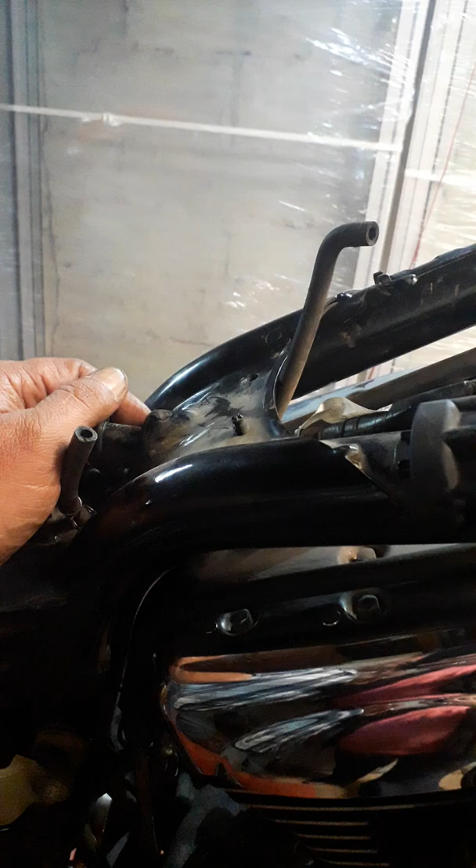Sorry for that. Okay, you take off the seat. I don't know where the phone stopped.

You take off the seat by removing these two 6mm bolts and the one 6mm bolt at the back. Take off the seat, it slides out. It's got a hook that's hooking here. You just lift it at the back and pull it out, and then we come to the tank.

I did remove the tank, I'll tell you now why. It's very simple. One bolt at the back, you take it out with this washer grommet setup, and then here you've got only one overflow pipe. You just pull it off somewhere with a long nose pliers or something. Just lift the tank a bit.

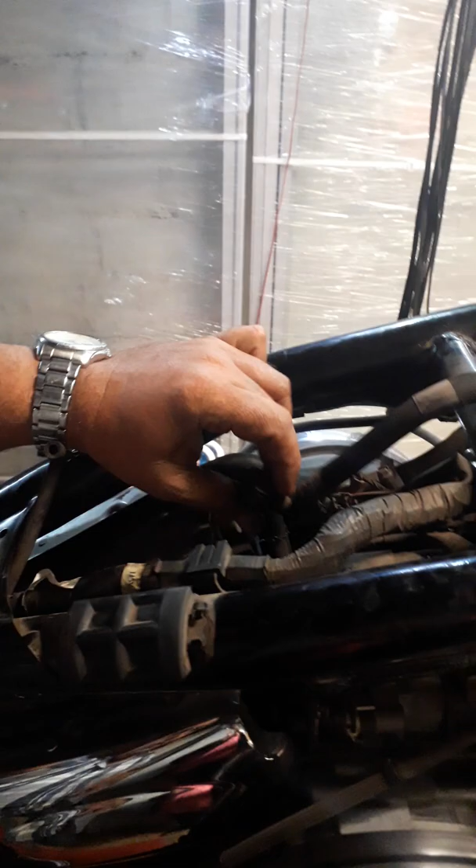Here you've got another underneath - another return pipe or whatsoever. And then this is the fuel injection. This pipe is also underneath the tank, and this one as well.

This one had a clamp, I took off the clamp and removed it. This one has got two simple clips on the side. You just push the two clips in like this and pull it off. I pushed the clips in and I just helped it off with a big flat screwdriver.

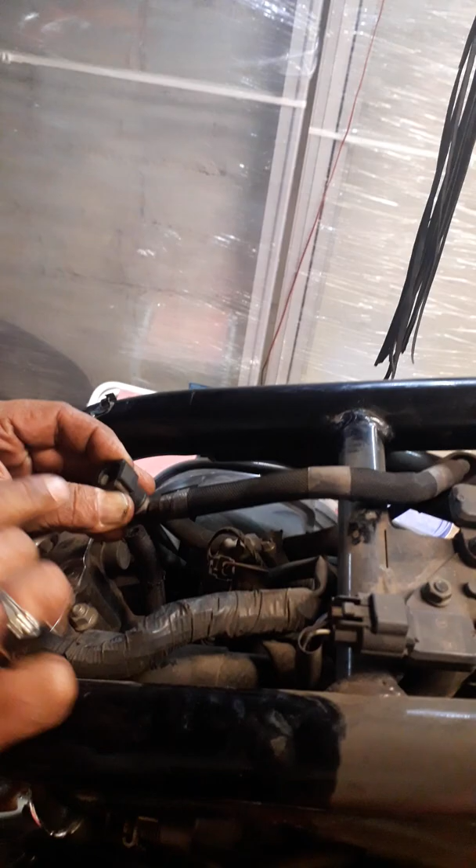Then you lift the tank. In the front you've got the ignition and stuff here on top. So there's only two plugs I took out, and then the tank comes off.

Alright, so I removed the tank, and then I removed only the one exhaust pipe. It wasn't necessary to remove the other one. The reason I removed this one, I think it was in the way of the caliper - the caliper or the stud for the shock.

I can't remember, but yeah, I stripped it about a week and a half ago, and then I ordered parts, so the parts came lately, and now I've got time to carry on again.

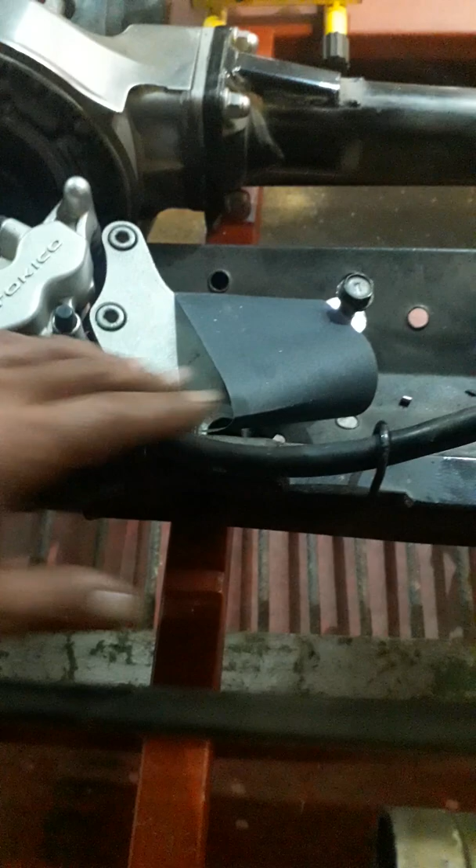Alright, so I took off the brake caliper at the back. It's only two bolts. I never took out the banjo connections here or in front. You can't remove it from here. The only way to remove it from here is to take the banjo bolts out and take it out like this, but it's not necessary, really it's not.

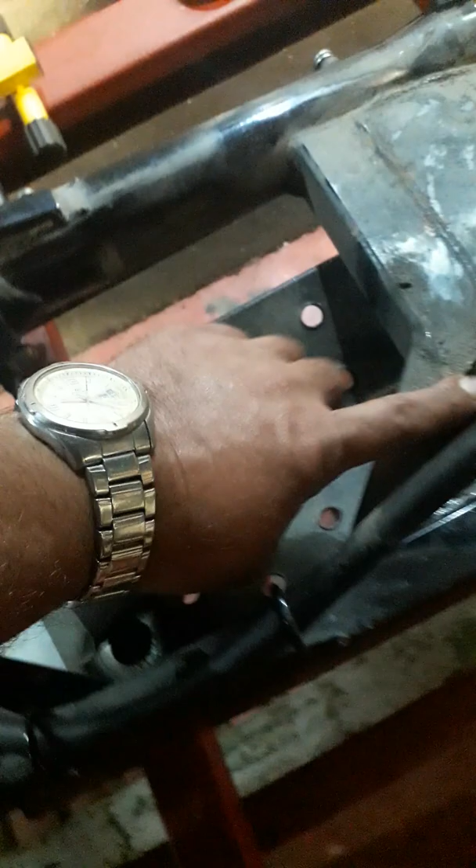You just unclip it here in the front. There's two clips. This pipe, the brake pipe, you will see it's clipped in there. So just unclip it there, very easy. And then I took out the shocks as well, the two rear shocks on top and bottom. It's very easy to take them off.

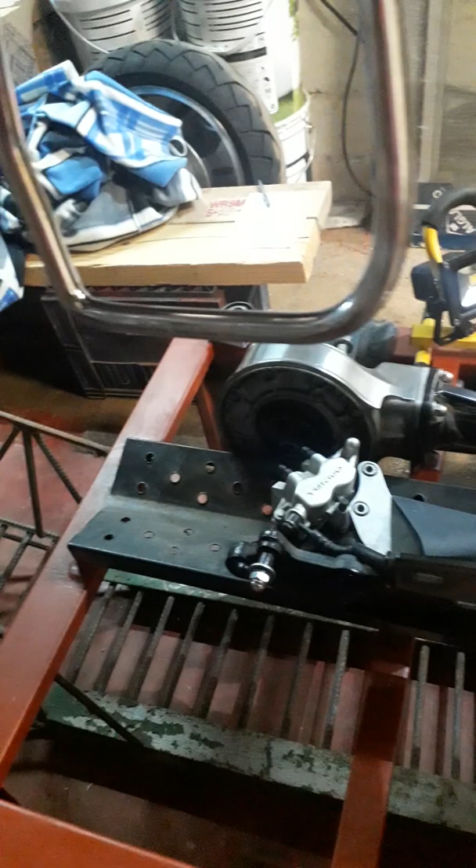The bike bench I've built myself because it's just picking it a little bit higher from the ground. I can't work on the ground like that. So I took a piece of wooden block, I cut it off, and there I put the car jack somewhere underneath the engine and picked the whole bike up.

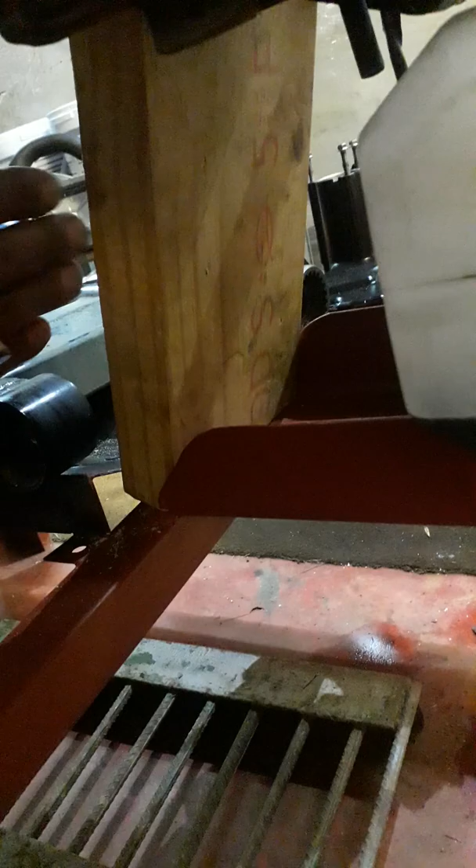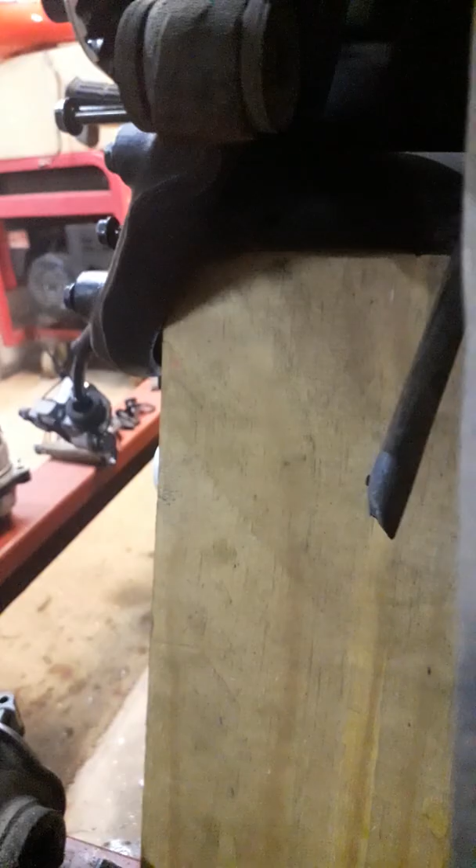And then I put the block here, and here at the back you can see properly. It's a big strong bar here, right there where my fingers is. So I lowered it, and then the bike is laying on that wooden block. And in the front I've got a wheel chock, so it's fine. It's keeping the bike up straight, no problems.

And then also I removed the rear wheel shaft as well. Here's all the parts. And then I stripped it from this side to the left side of the back. And let's go to the other side.

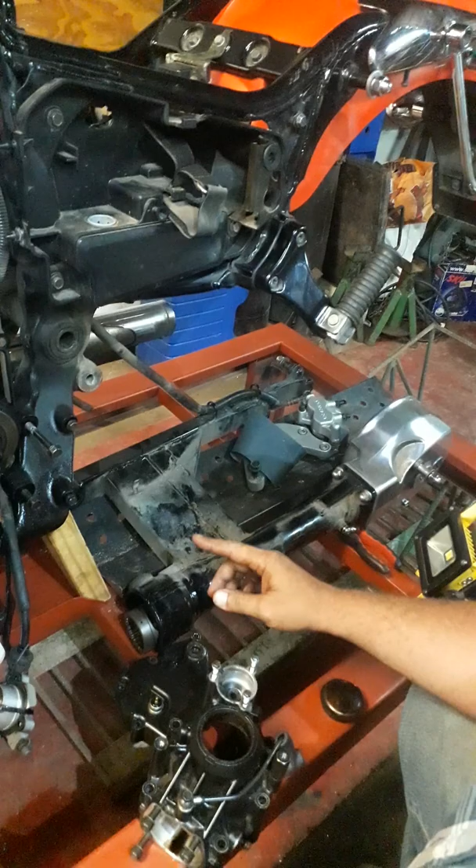Alright guys, so I took off this shock on this side as well, and then I removed the drive shaft first before I took off the rear swing arm with the drive shaft built into it. I took off the drive shaft first.

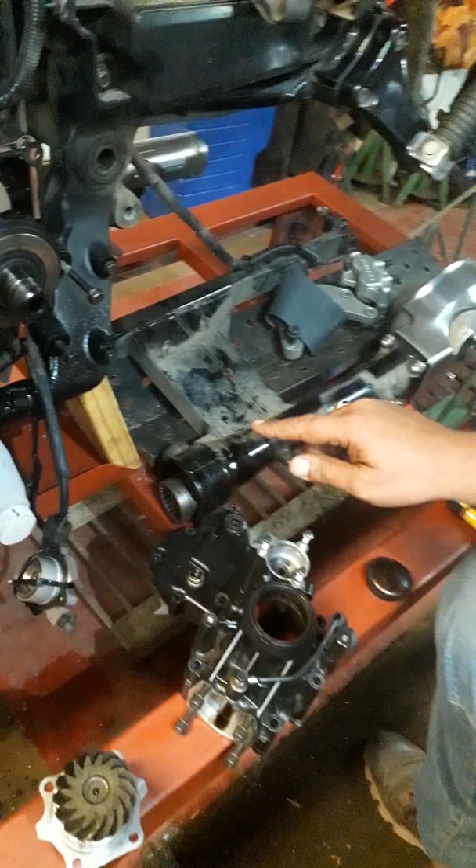Excuse me. There's a trick to remove it, and then you must be very careful. The drive shaft pushes in here, right here. It's got splines, it goes in here. You see there's a little hole - right in front of my finger is a little hole, very tiny hole.

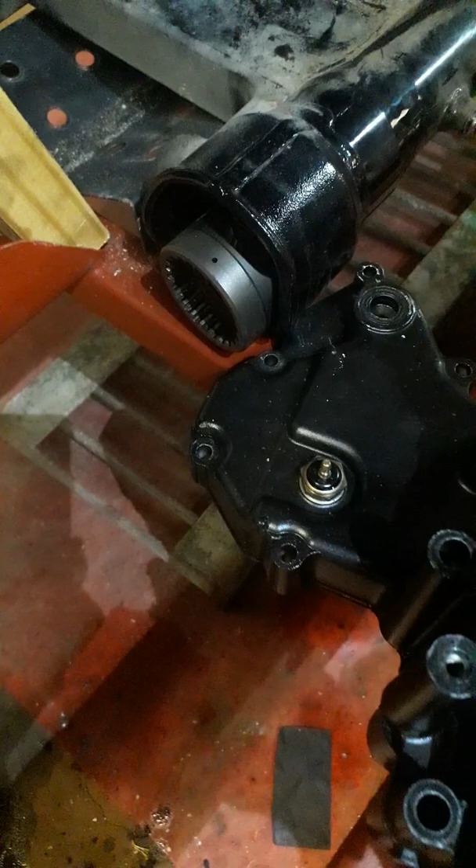That's it. On the inside, on one of them, I can feel it's a little bit bigger on the inside. So what happens there, in this one we've got another hole there, right there.

There's a tiny little pin, and it's very easy to remove, very easy. Because that hole is smaller on top, this little pin - very tiny pin, don't lose it, believe me, don't lose it - goes in there, but it can't come through because the hole is smaller. On the inside here we've got like a plate, spring, something. So if you put it in here, it pushes against that spring, but it's sticking out a bit there.

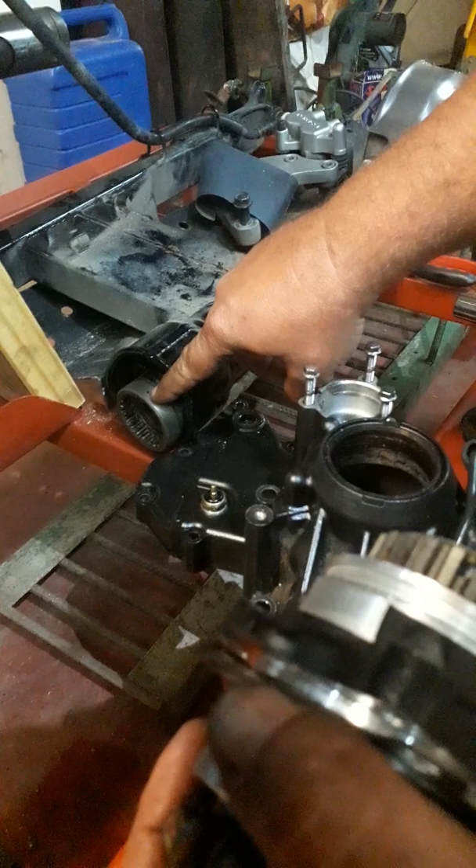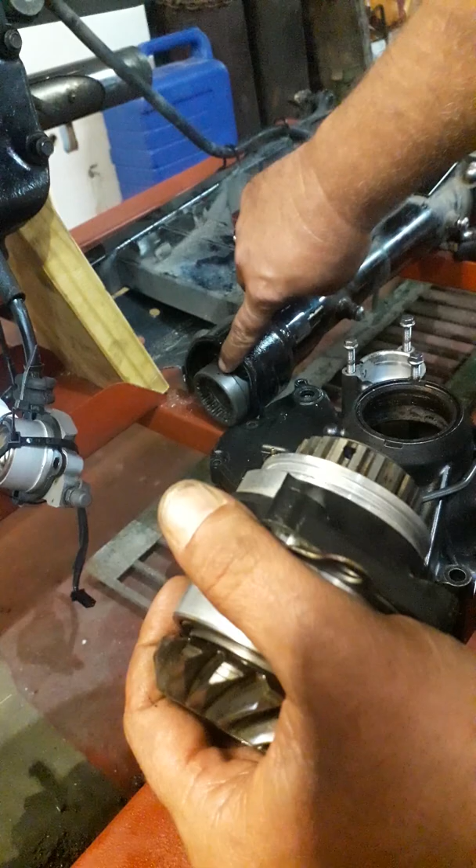And this gear here in front is taper. So with this thing in place, you just push it up, make sure to line up the hole with a pin, and you hear a tiny little click, then it's in. From there, to remove it is very easy. You just take a paper clip or something, open it up and push it in there.

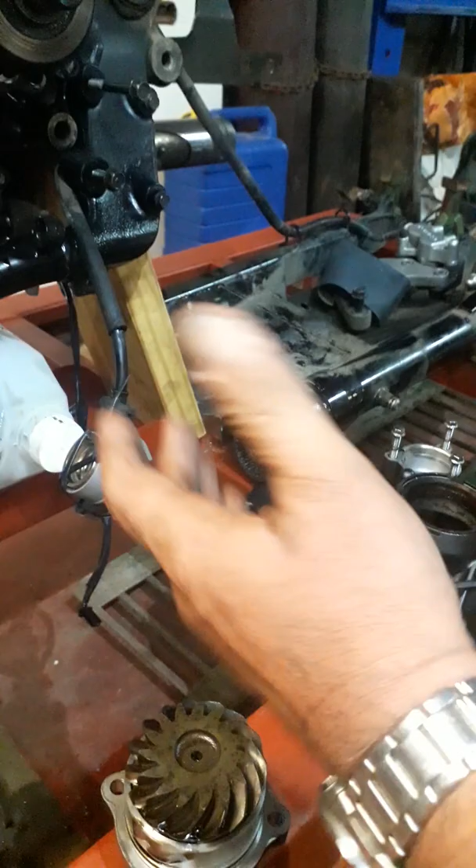Alright, then what I did, I removed the engine mountings.

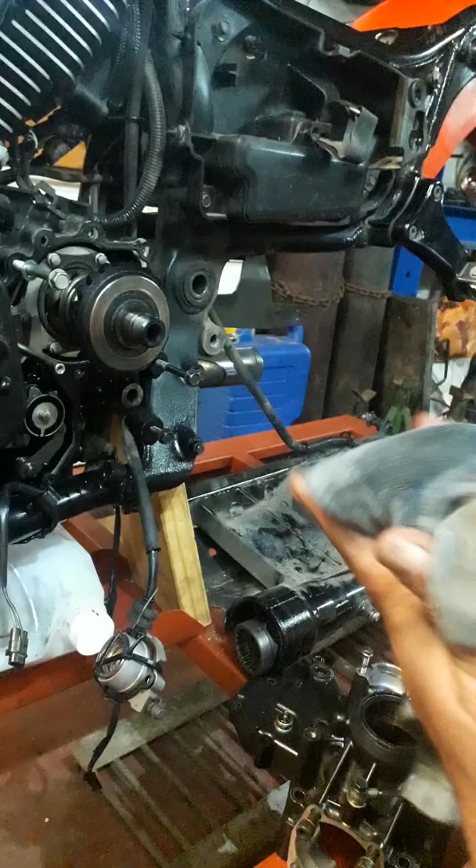The reason there were no clutch on the bike is actually very simple too. I couldn't understand why the clutch went gone and there were no clutch, but as long as you throttle and it's cooling off a bit, then the clutch is back again. But the moment you start closing the fuel, the accelerator, and this noise is there, the clutch disappears again, then there's no clutch anymore.

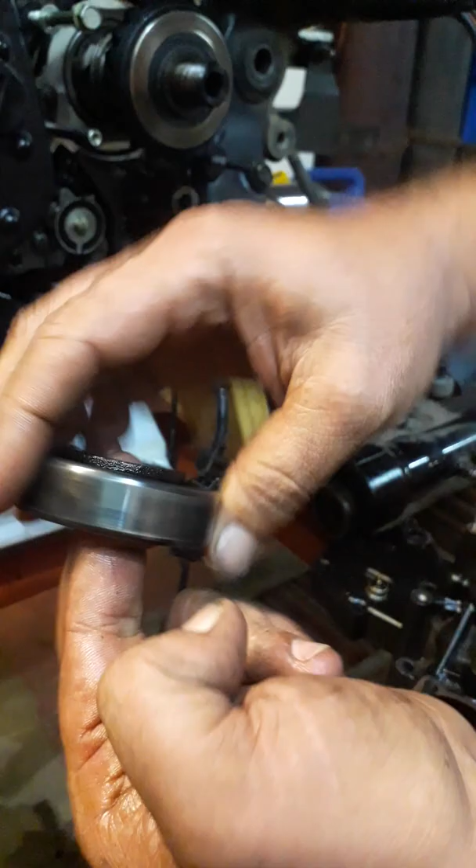The reason why, our bevel bearing - this is the condition of the original factory fitted bevel bearing. Now, some guys in the engineering business will know that this is not right. No ball bearing in the world can work like this.

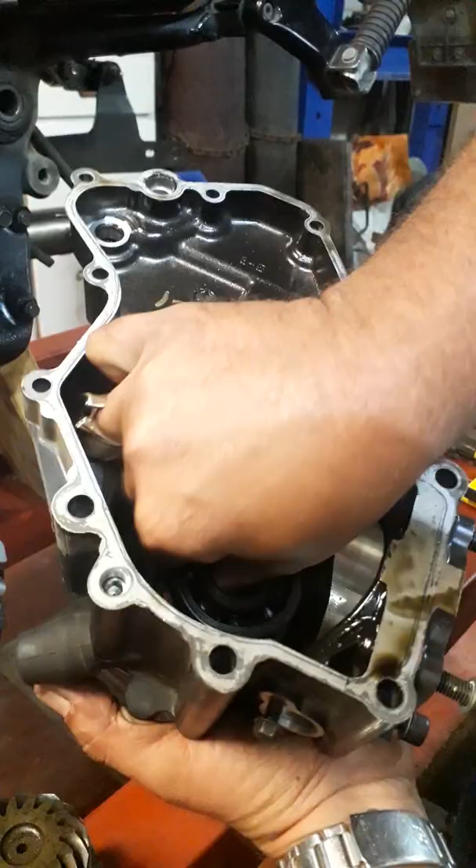Okay, so alright, it is situated right next to the bevel gear with this big nut over here. And actually, first of all, it goes in here first, underneath, into the casing, and then there's a little plate that goes over the bearing.

It's tightening with two small bolts, 6mm bolts. Right there, you'll see when you open it today. It keeps the bearing in place there inside. Now this bearing is the problem. There's the little bolt that keeps it attached.

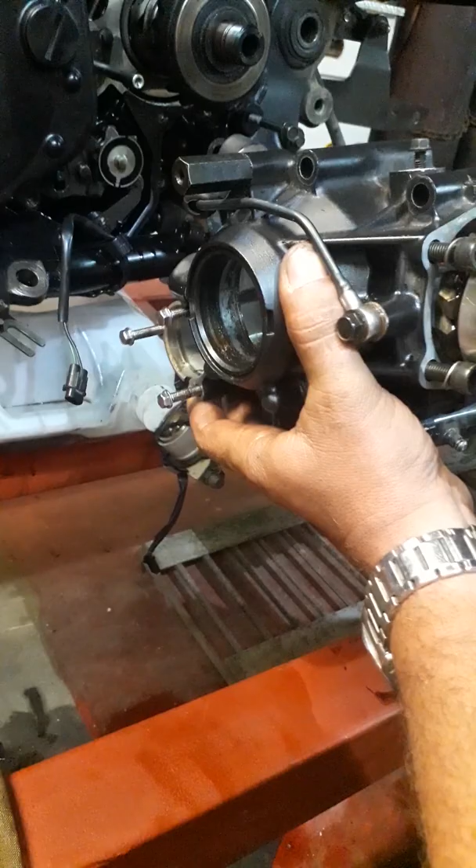So at the end of the day, you've got this cover here. The drive shaft part comes here at the back, exactly like this. The reason why you have to strip everything all around is to take this thing off, because inside this bevel gear - I usually talk about the crown and pinion gear - whatever, works like this.

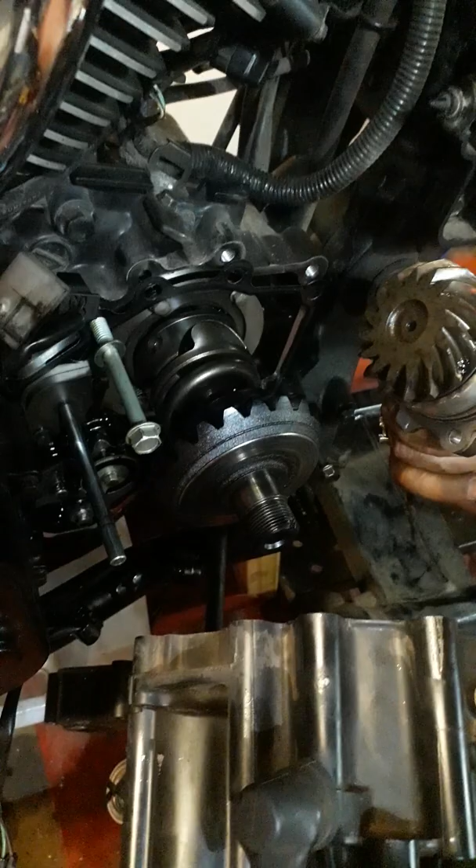Alright, and you can't take off this cover with this piece intact, because it's keeping it. If this gear was on the other side, yeah, no problem, but this is the problem. This is the reason why we have to strip everything to get this drive gear out from the back side.

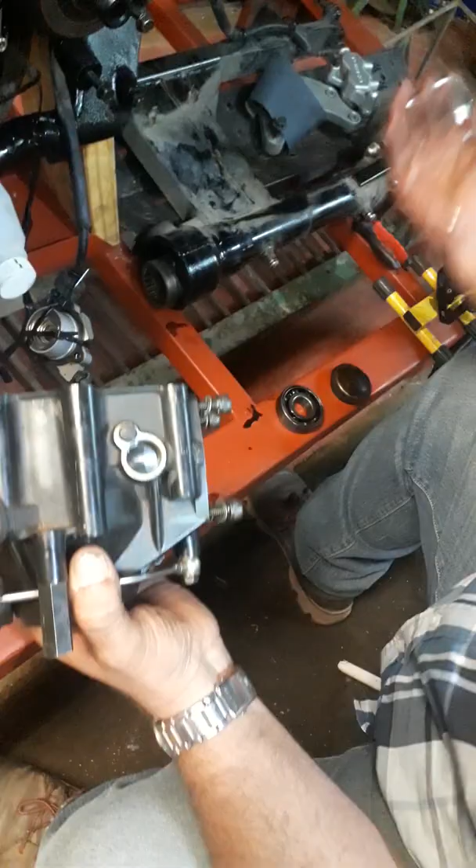Alright, so to cut a long story short, I removed the engine mountings at the back. While it's still standing in a block, I was lifting it at the back. The reason why - only one bolt - you struggle to get it out. You really struggle. You can loosen it, you can take it out halfway, but it pushes against the frame. Alright, that's the first thing.

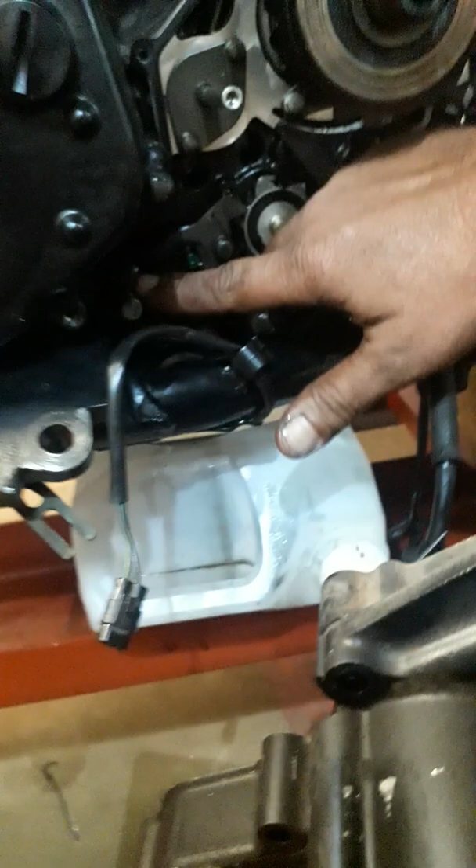The second thing is the gear lever shaft here from the gearbox. Put some more light for us. There we go, there you see the gear lever shaft. The gear links goes onto it. This one, it goes in just like this, in this position.

Now this is another problem to take off. Only to take this link off that shaft, because you have to remove it before you can pull off this cover. Alright, so what I did is I even took out the front engine mounting, I even loosened the front two bolts.

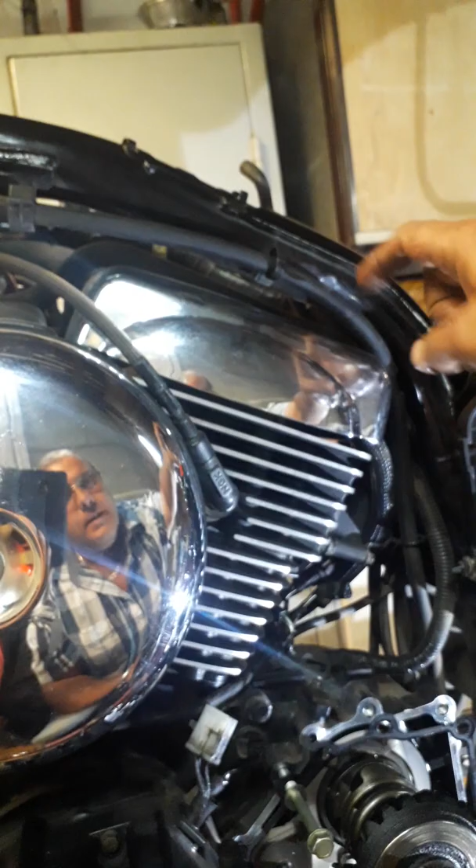This is the reason I took off the tank, is because to lift the engine, so it mustn't push the tank and stuff. But I can lift the engine. What I did is, eventually, it took me about 3 hours to strip everything to get this bevel bearing out.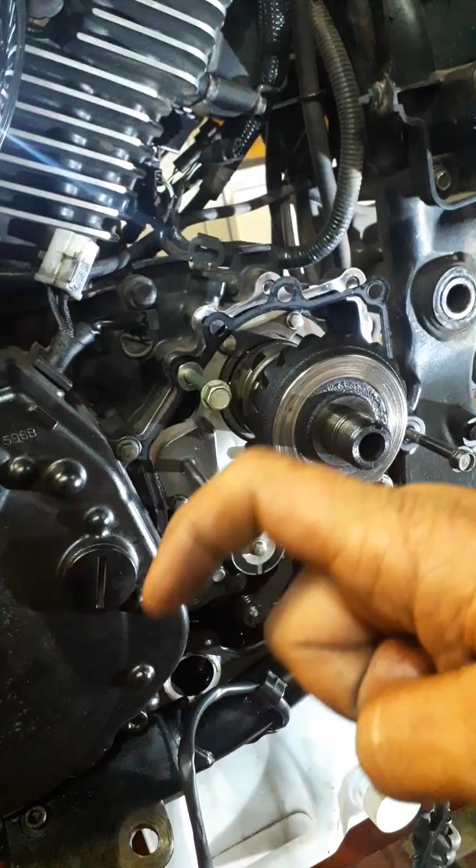Of here, what I did is I took a guala - I don't know, I believe guala is the right English word for it. It's a piece of iron with a point like this, but only a little bit.

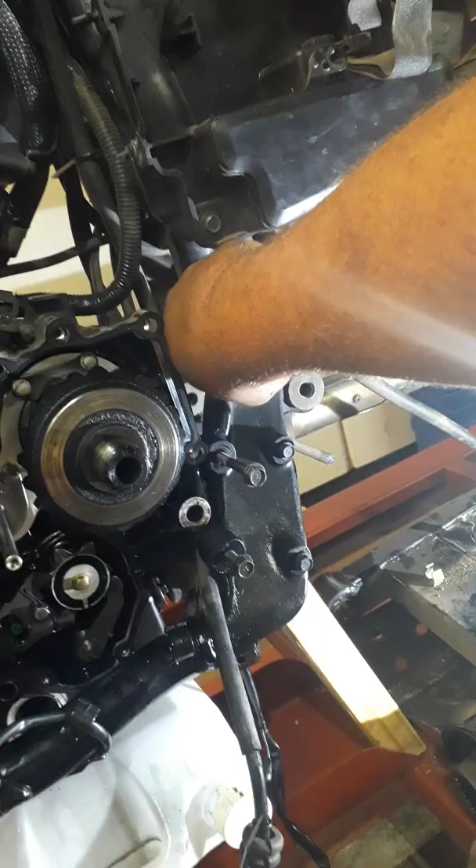And then I put it here at the back. Just be careful for the pipes, don't hurt the pipes at the back. And then I push the engine forward a bit.

The reason is to get it forward is for this. Right here I experienced some problem because you have only like 1 inch, 25 millimeters gap. That's it, that's not enough to take out that bolt at the bottom and that gear shaft.

Alright, so I took off the front mountings as well, and then I moved the engine a bit forward, and then I tilted it over like this, and then still not easy, just take it off. I still struggled, but I managed to get it off.

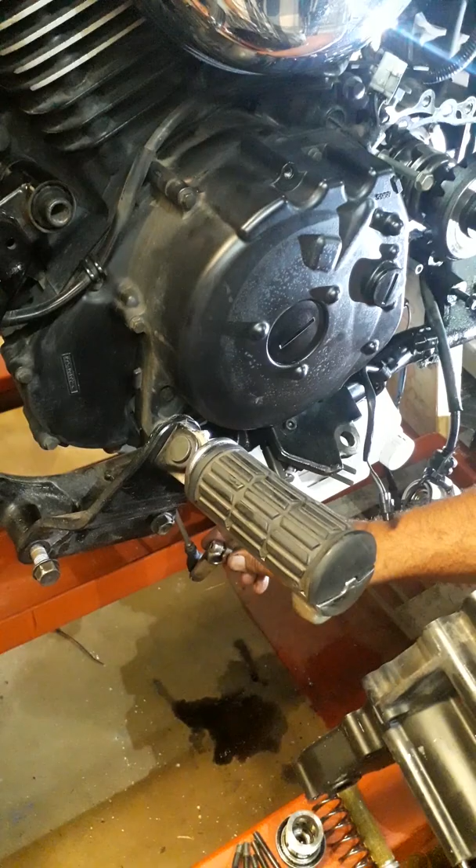Alright, the one bolt out, and then the other one is that link. I took out the bolt, and I took a big flat screwdriver and I wedged it open as far as possible. Be careful, not too far, it might break off.

This is just a casting, so it's not very flexible, and it's easy to break. So I just wedged it open a bit, and then I took it off eventually. Alright, so I took it apart.

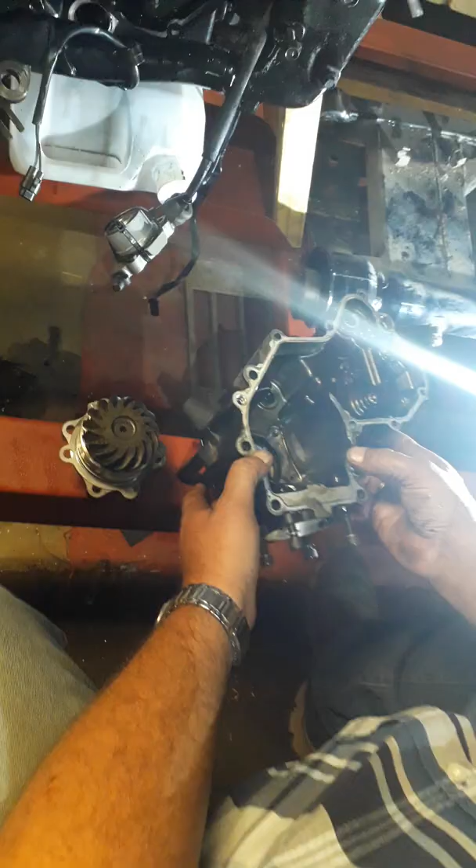I've stripped everything up and until here where I am. I haven't cleaned anything yet, but the moment I took off this cover, I wiped out some of the pieces on this cover. On the end of the day, a bearing with play like this, you must have shavings, and the shavings were laying all over here inside, etc, etc. So underneath...

Underneath here we've got a pre-filter right here behind the stand, actually, but on the engine we've got a pre-filter. It's a big bolt like this. You must take it out, please guys, take it out. Then you'll find it inside. It's just lying like this.

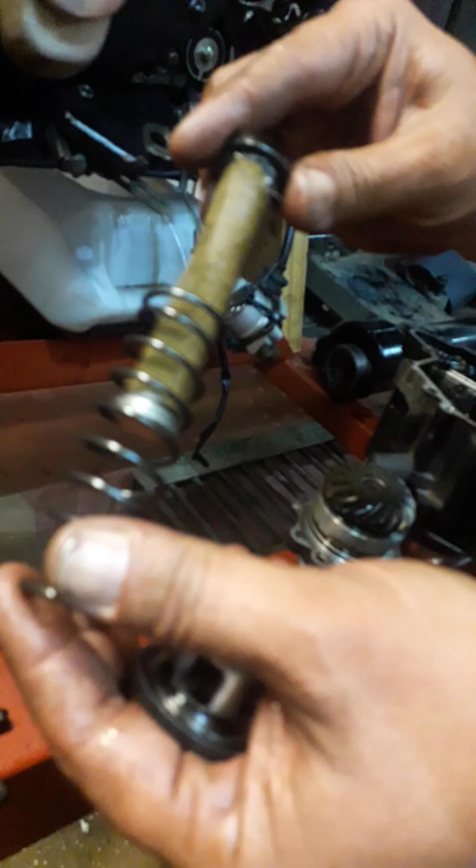This is just a filter, a pre-filter. You take out the bolt, it's only this cap, number one. Number two, you take a long nose pliers, grab this filter and pull it out. And the moment you pull it out, see what's on it. See what we have on the pre-filter itself - all that bearing shavings.

You don't want shavings in the engine. Luckily there's a pre-filter that catches most of it. From here it goes to the oil filter. So on the end of the day, after cleaning everything and assembling everything, I will obviously clean the pre-filter, etc, and put a new filter with some cheap oil, just cheap motor oil.

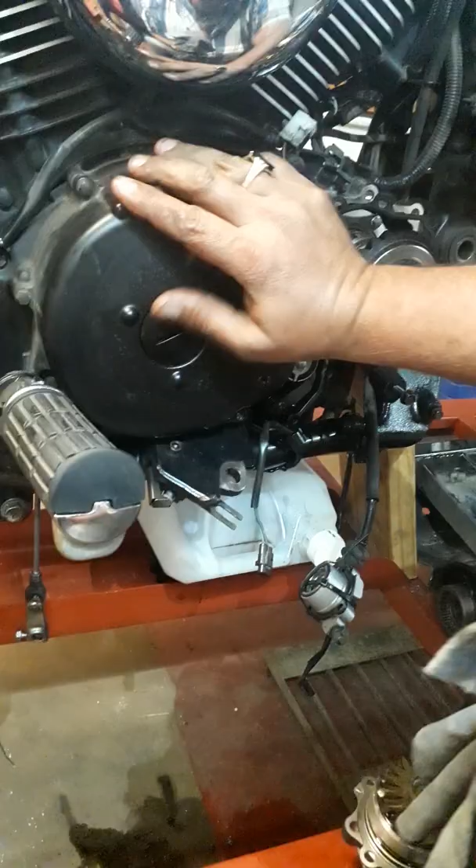This bike uses - I can't remember, but I've got plenty of vehicles here, I can't remember every vehicle's type of oil, so I've got it written there. But I know it's a very expensive oil. So I'll buy the expensive oil with like 3 filters and put it to one side.

And let's say 2 containers of cheap oil. Then after cleaning this and assembling everything, I'll put the new filter with cheap oil, just start it and run it like, say, only 5 kilos or so. Come back and drain that oil immediately, and also change the filter again with a new one, and take out the pre-filter, clean it again, just to make sure you get all the pieces out as far as possible.

And replace it again with another new cheap oil and do the same. Just flush it like 2-3 times maybe, and then at the end, the last shot, you just put your expensive oil, the right oil, and the right oil filter. Then you know you shouldn't have any problem from there.

Okay, so guys, in the beginning of the video I told you that my whole life long I was rebuilding bikes. Currently I'm busy rebuilding an old Kawasaki KZ1000 shaft. But this is the last one I'm building because it's getting difficult to get parts and stuff. But yeah, it's almost done. Anyway...

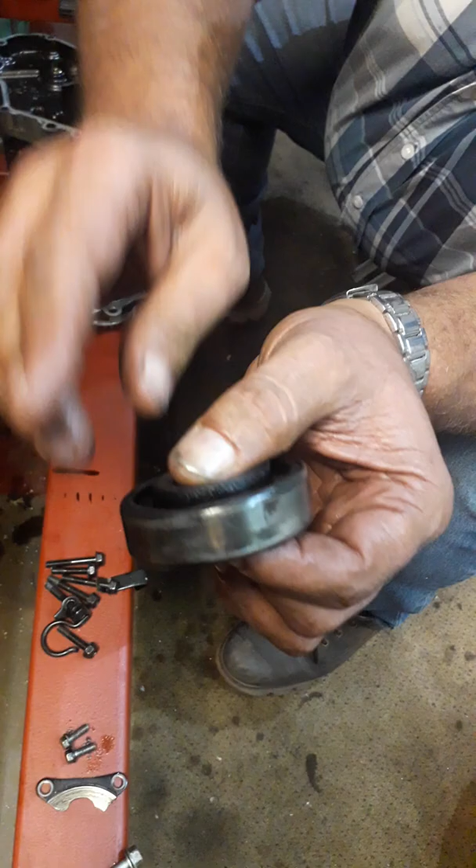When I stopped at the second last robot from my house, another guy in the car next to me showed me, hey, look, your bike is on fire - it was only smoke and stuff. Well, it was raining that day like mad, and I was riding in the water and stuff. But it was overheating. It burned.

So on the side of this cover, you've got a little cap - not a little cap, it's actually a large cap. Here it is, it just pushes in there, and it's got a rubber seal. But it got so extremely hot, this seal burned. There, it's broken as well.

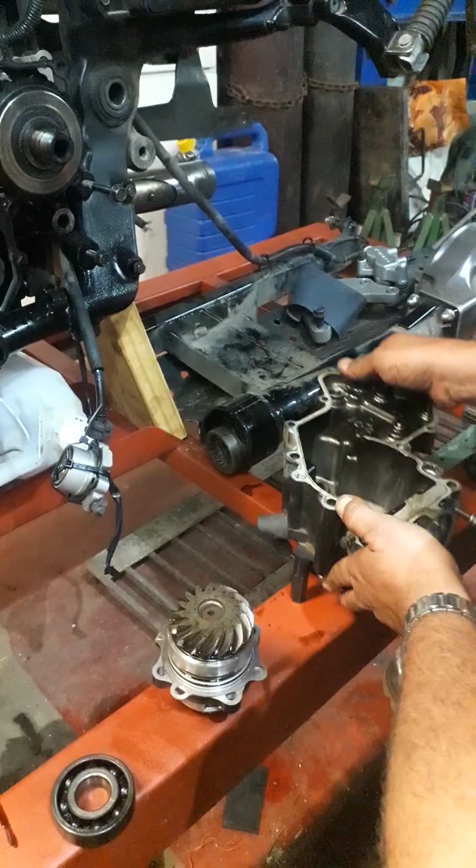But anyway, I'll make a plan to get it sealed again, or even if I have to order a new one from Kawasaki, I'll do so. But I'll get it right. Anyway, usually, like I said, when something happens, I'm the type of person who wants to know why did it happen. So I will sit here and look everything over and over until I know. Now, I'm not the most clever person in the world, but with my little experience, I can think for myself.

Out of my side, I just think that Kawasaki made a mistake here. Guys, please don't just replace this bearing. No, in my eyes, like I said, from my side, it's not the right thing to do. This is not the right bearing for this job. Like I said, if I can help only one guy, I'll be happy. Think for yourself, guys that know about gears and stuff.

This shaft here with the bevel gear on it pulls off like this very easily. That's it, those 3 teeth work into those 3 slots over there. And here we've got a needle bearing. Now there's some splines with a spring, and then here comes your bevel gear.

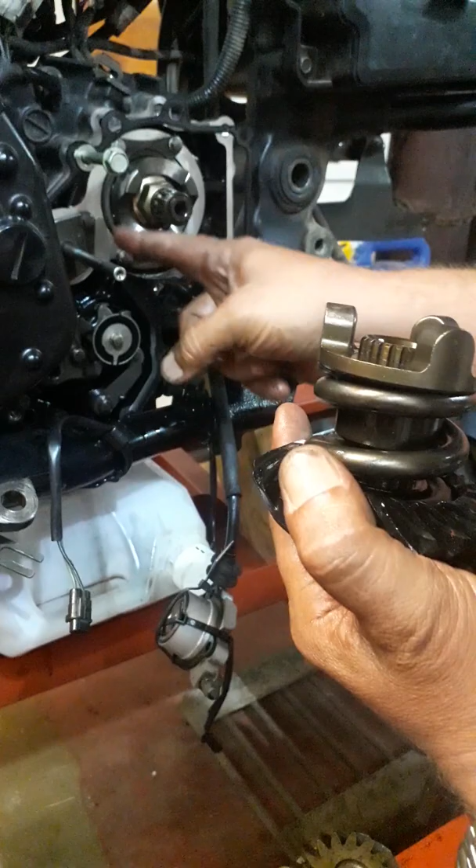So the moment, inside here we've got another large bearing, almost like the bevel bearing, but a bit bigger. But this is part of the gearbox bearing itself. And to be honest with you, this bearing is actually, look, there's still some shavings and stuff that must get out.

This is actually the old bevel bearing that's broken now. Guys, this is actually a Koyo bearing made in Japan. The part number for it is 6305. This is really a very good bearing, but it was used the wrong way.

Now this is the people that design everything, they don't think that something like this will happen. So there are mistakes, and then we just fix it afterwards and do it better.

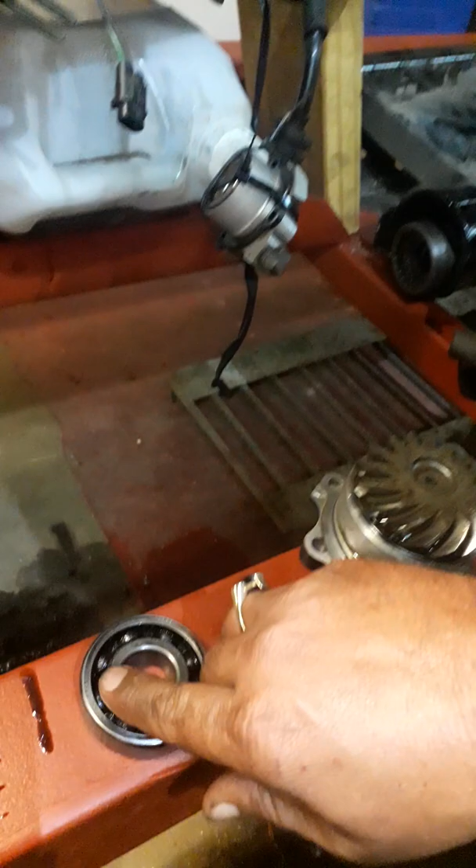So you put this bearing, 6305, the original one. You can buy it, you can order it from Kawasaki itself. Our local bearing shop does have them in stock, plenty of them, so it's not necessary to order from Kawasaki, because here we don't get any Kawasaki parts easily. We always have to order, and it takes weeks to come. But this is a bearing you can get from your local dealers, bearing shops and stuff.

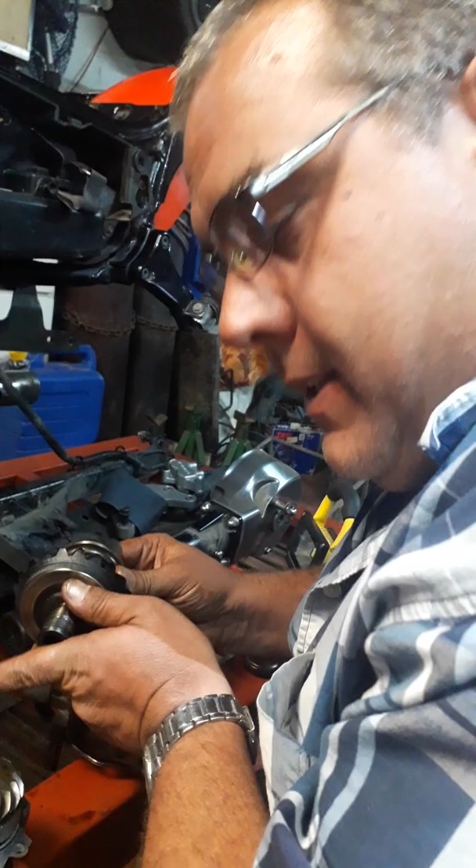Alright, but I took it out and I was thinking, before I even asked for another bearing to put up here - when you replace it with the same 6305 bearing, believe me, after 30-something thousand miles, we are sitting right here again, and you don't want that.

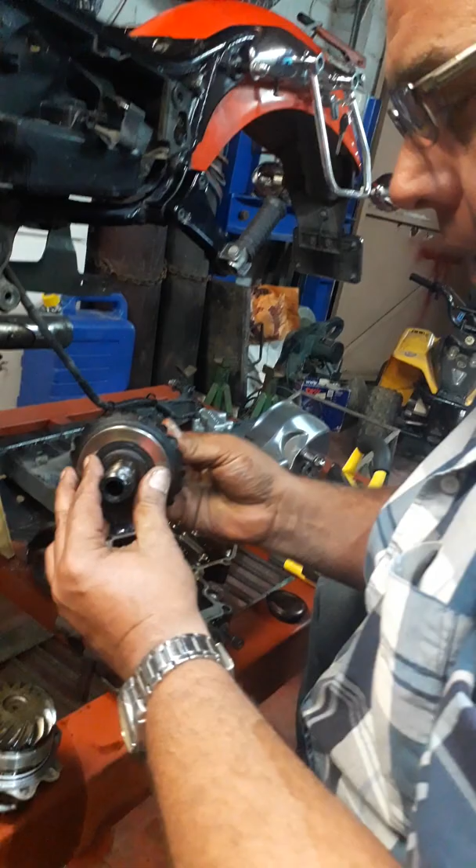It's not an easy job to strip this, and guys, I want to help. I really want to help. I don't want any money or anything, I really want to help.

A bearing is designed, in this case, to go into that casing and a shaft goes through it. So in the casing, it can work like this - it can take tons of pressure on the top, the bottom, the front, whatsoever. It can work very hard, it can take a lot of pressure, and it will last.

Especially this bearing inside the gearbox with an oil supply - it's actually impossible to fail. Like I said, I've been rebuilding bikes my whole life, and I don't get gearbox bearing trouble. Never. You don't get them because they're pushing forward, backward, up or down the right way. So they've used the right bearing for the right thing. But this is not right.

The reason I'm telling you that - if you look at this bevel gear, it goes up there, and it's got a needle bearing. We call it a needle bearing, this with the long balls, sticks - these are the needle bearings. Very, very good bearings, and they can also handle plenty of pressure. That bearing works inside this bevel gear shaft.

Okay, so let me just put it back like this, over on its shaft. So the moment I've got the bevel gear in here, whatever happens here, that bevel gear gets pressure from the top, the front, the back, the bottom, whatsoever - it can handle it. Alright, now here's the trick, when this thing is assembled.

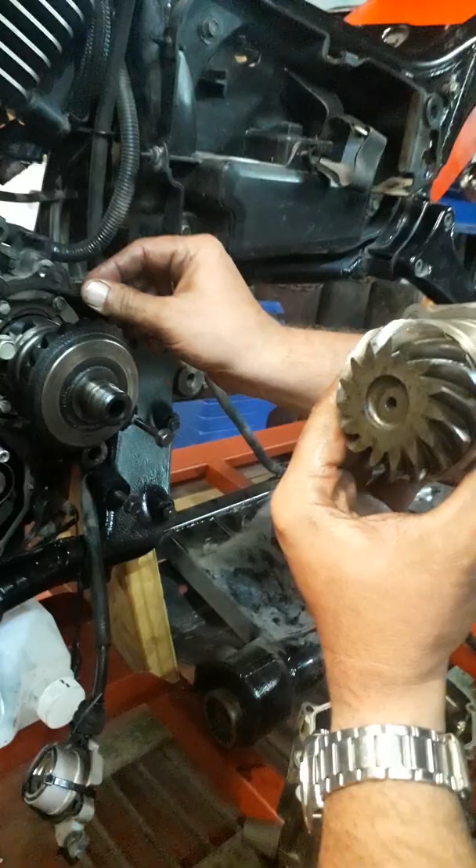Also a thing that I've noticed is that some of the YouTube clips, the guys got the gasket here - it's packing, you know, normal packing, but this is a steel plate gasket. I think this is also shims, I'm not sure because there's two of them. I think this is how they shim the space between the two gears.

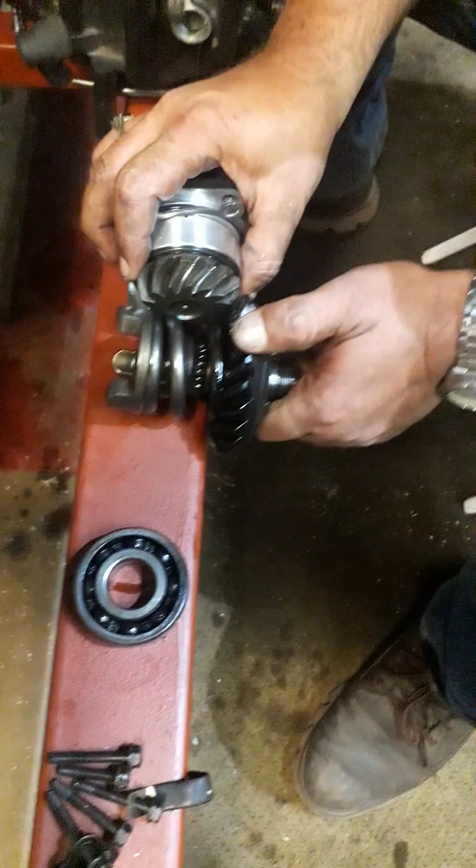Alright, so anyway, let me just take it off like this. This gear is working like this. Exactly. Now here comes the trick - that is the thing. The moment you turn this shaft, because it's not gears that run in front of each other like inside the gearbox - because of that, it's a crown and pinion gear. We've got like a 45-degree angle here.

Okay, so to cut a long story short, the moment you put some torque on the shaft, what is going to happen? Every tooth on this bevel gear has an angle - it must have an angle. You see, it's thick at the bottom, thin at the top, which means it's got an angle.

The reason is, because of its angle, the moment you put torque on it, it's like it's pushing them away from each other. The moment you put torque on it, it pushes them away from each other. Do you understand what I mean? So what happens now?

Let's just put this down. Remember that this bevel gearing was sitting here at the back, like this.

Okay, so the moment this happens, that it's pushing away, what happens now? With everything assembled, you do have your pressure from the side. Look clearly. What happened? This is what happened. You see, it's pushing it out. It mustn't push it out.

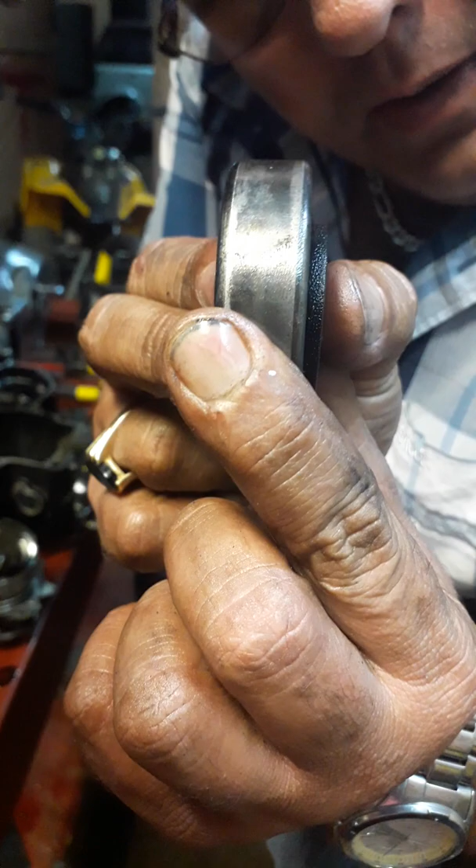This bearing is not designed to take any pressure from the sides. Not at all. It's a very good bearing, I'm honest, but use it the right way. This is not the right way. It can't handle it—no ball bearing in the world, no normal ball bearing like this, can handle pressure from the side.

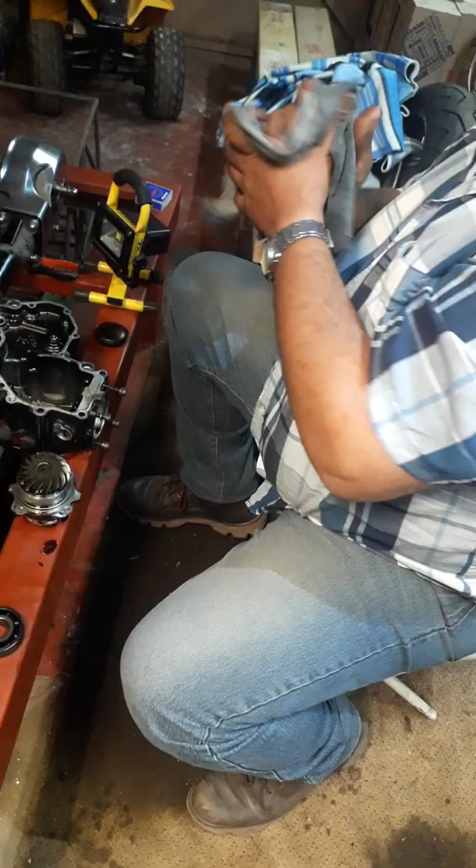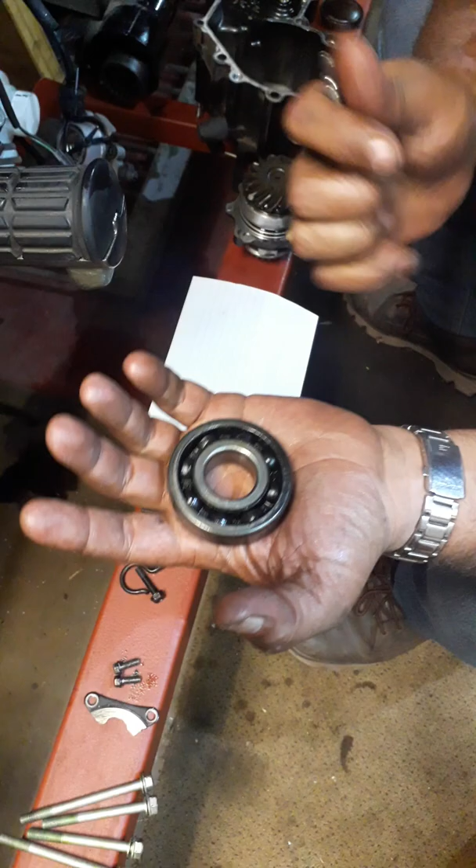Let me show you something else. Let's take a grinder, put this bearing on the table and cut this bearing between the balls, or right in the middle of a ball, from this side to this side. We cut it in half and turn it like this. What do we have?

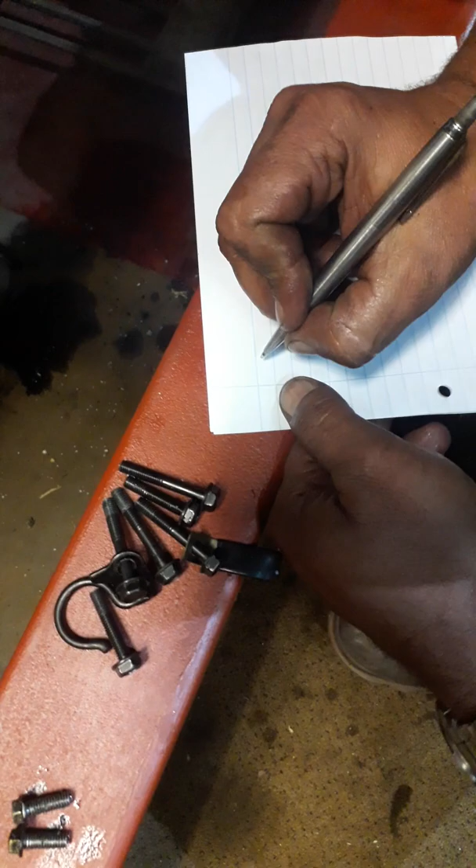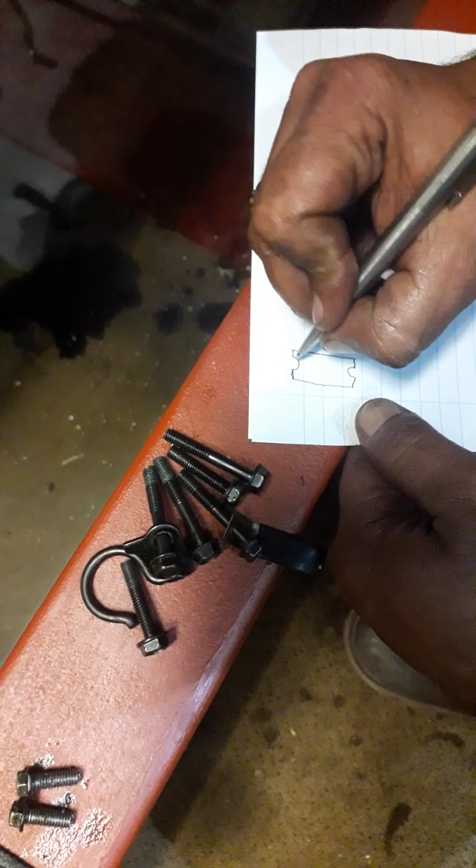We've got the bearing over there. The inside goes like this—it's got a slot where the ball is running. This is the inside of the bearing. Then you've got your ball bearing itself, that steel ball in there. And then the outside of the bearing, we've got this.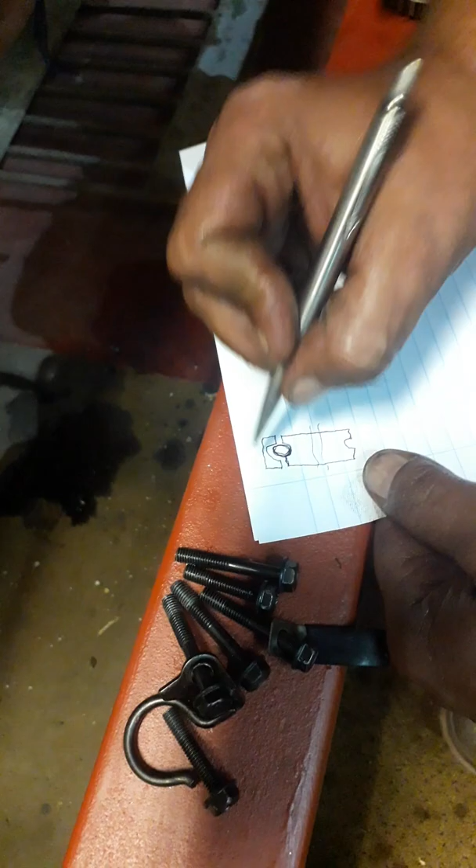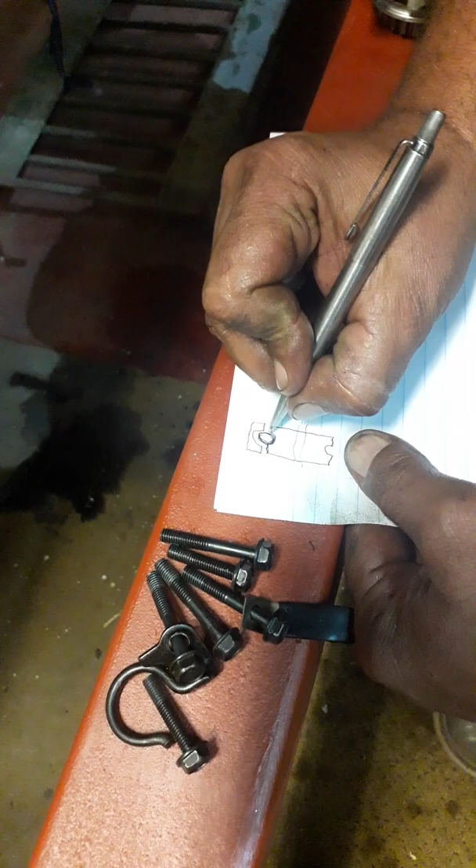So the bevel shaft goes through here, and this part is inside the casing. Now with the pressure from the side, what happens? Where is this bearing working? Because it's pushing from the side, it wants to push through, but that steel ball is blocking it, which means it's running only on that little side, from there to there.

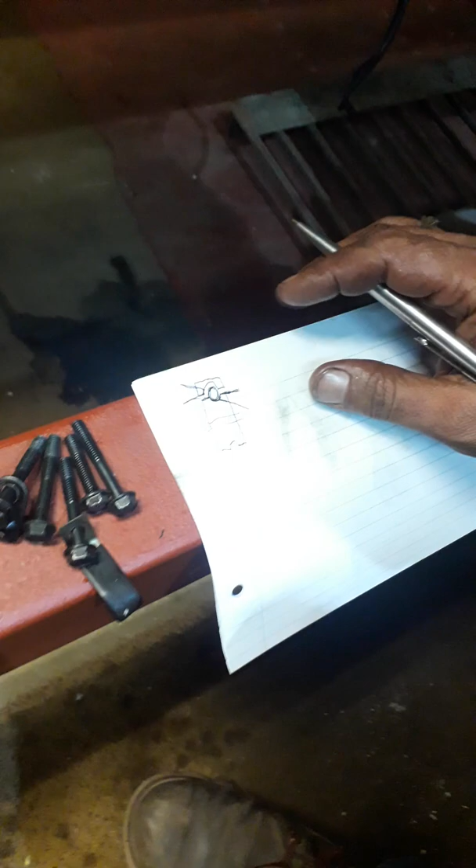Look at that—exactly the same on the outside piece. It's running only on this little side here. I really hope you understand it. And this is a hell of a torque, it's plenty of pressure, and all that pressure is only running on the inside of that bearing, on this little bit of meat here at the bottom and there on the top.

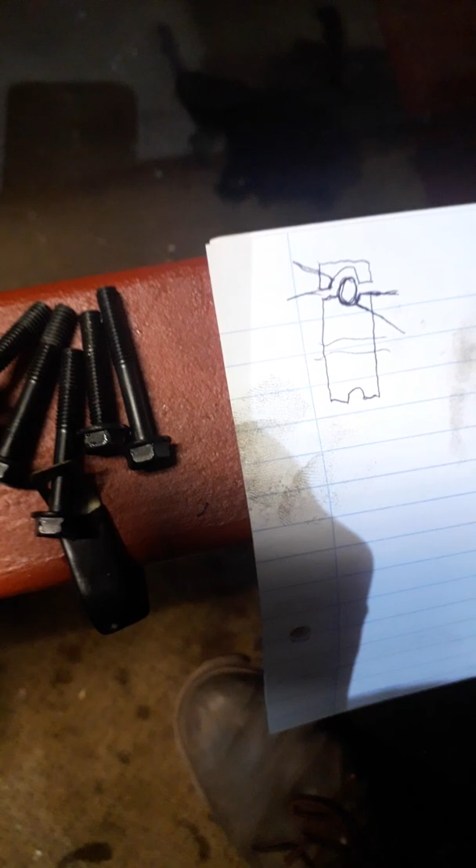So this is that bearing, 6305, that Kawasaki used for a bevel bearing. Now me myself, I say no go—don't replace it with that bearing. Go and buy another bearing. I'll give you the number and show you exactly.

It's an NSK bearing, a decent bearing, brand new. This bearing is actually exactly the same as the old bevel bearing. See what happened because of the pressure on the side? There's not really play, but yeah. Anyway, if you look at this bearing and the number on it, it's an NSK bearing.

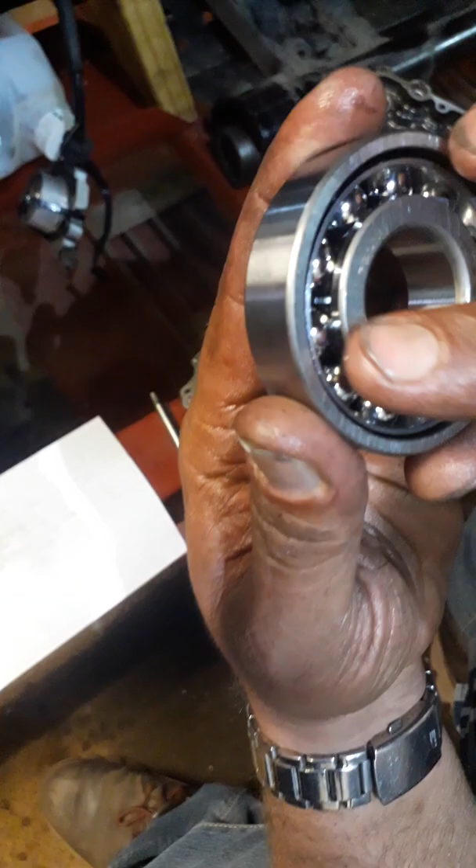The number, hopefully you can see when we zoom in. I'm watching through the camera now—73, just want to show you, 7305B. This is the number of this part, this bearing. It's also made in Japan, same as the other one.

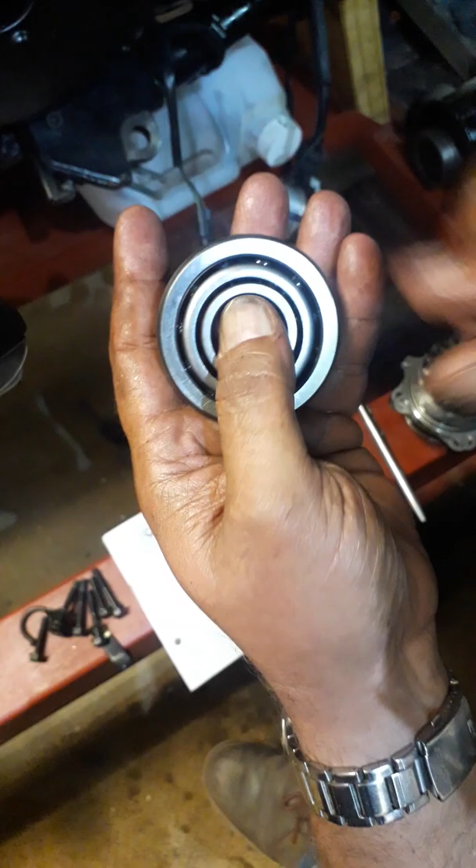So which means, if you look at this—thicker this side, thinner this side—this bearing inside is going tapered, and also this one is going tapered. So let me show you on this paper I've got here. I'm gonna draw the exact same thing, but where your steel balls are working, it's not level, it's tapered.

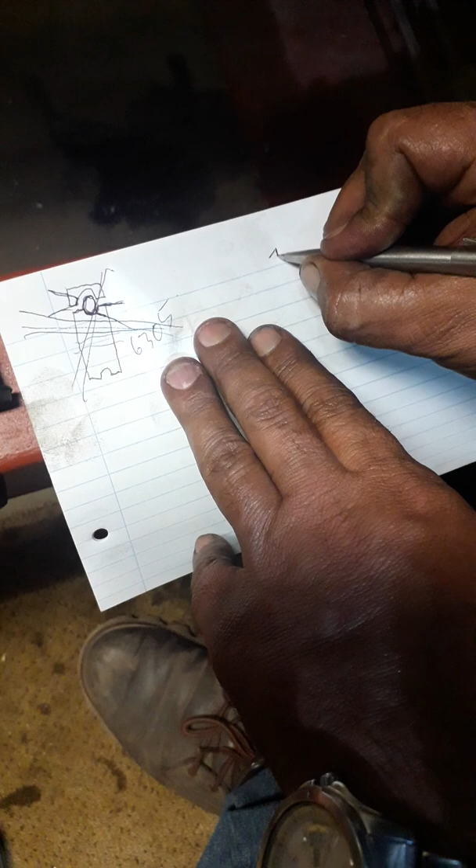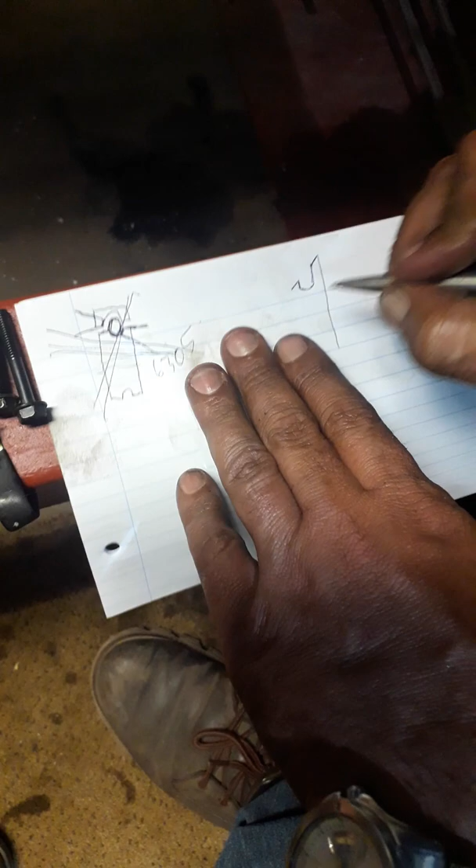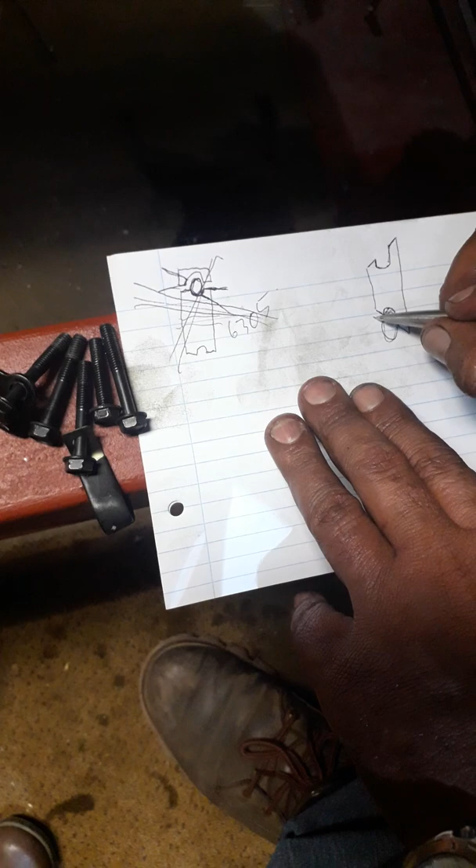A little bit of meat in the front, it goes around, and then you've got more meat at the back, something like that. I haven't measured it exactly, but this is how it works—a little bit in front and more at the back. Okay, so then you've got your steel ball in there, so you've got much more meat here that it's working on. And on the outside piece, more in front, a little at the back.

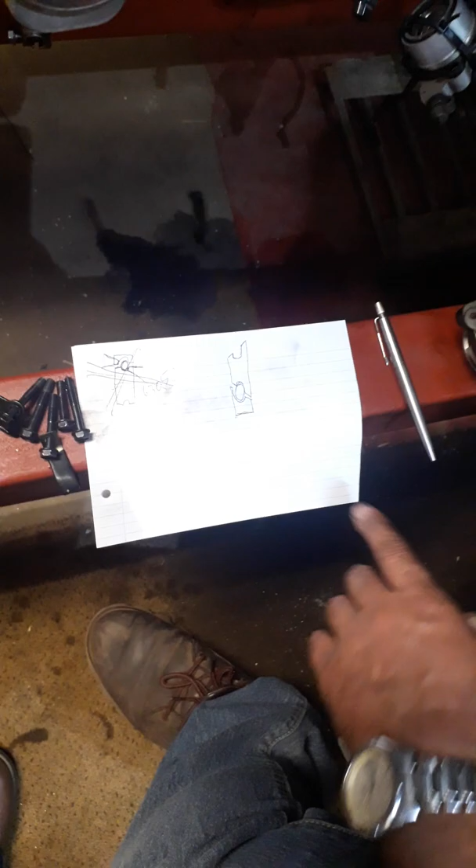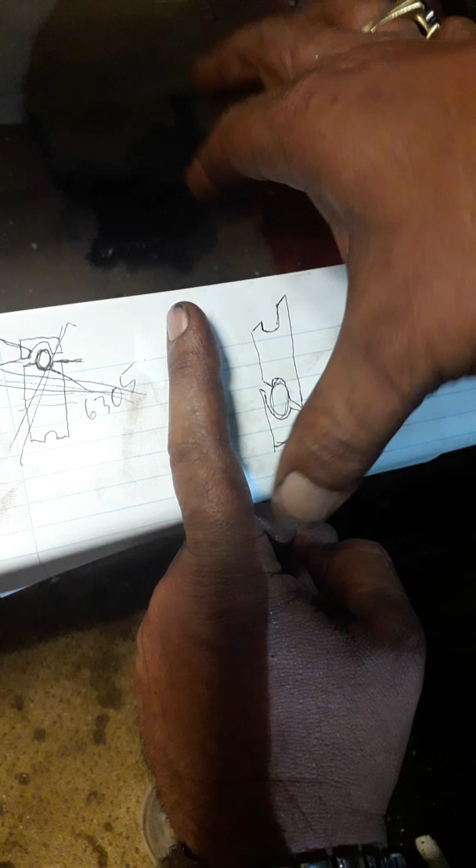Something like this, guys. So this bearing, there's only one way you can install it. Let me show you that way. If you look at this bearing, installed correctly it can take pressure from this side—it's not built for pressure both sides, front, rear, bottom, top, and also from the side. So if you look at this bearing, here's your thick side, here's your thin side, which means it can have plenty of pressure from this side—which is exactly how I've got it now.

This is exactly how I must get it on there. And it fits like a dream, 100%. Your ID, OD, thickness, everything is the same, but the angle on the inside is a hell of a difference.

So let's say 35,000 miles, maybe 300,000 miles, I'm not sure. I haven't installed it yet—this is the first time I've put it up now. But I believe...